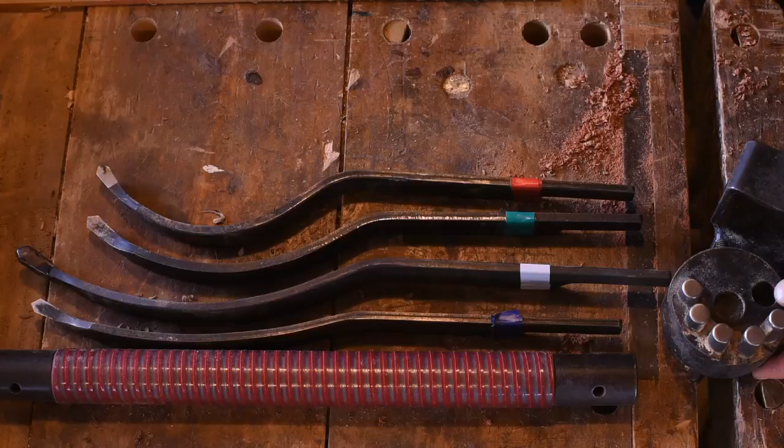This little video is to show you how to make your own angle finder jig that you use with the McNaughton curved blade system, their center saver, so that you can get perfectly even thickness bowls every time. The materials you need to make the center saver angle finder jig, let me show you.

The main thing you need is a piece of clear perspex, 6mm thick perspex ideally. This piece here is about 320 wide by 400, which is an ideal size, as it will mean that I can make the whole jig out of this one piece of perspex.

The only other materials you will need is some small set screws. These are 5mm M5 set screws, a set of washers, ideally a wing nut and a lock nut. Tools that you will need is a good old-fashioned ruler, a nice sharp pencil or clutch pencil. You'll need a compass for making circles, as well as a large compass or something similar to make large circles with.

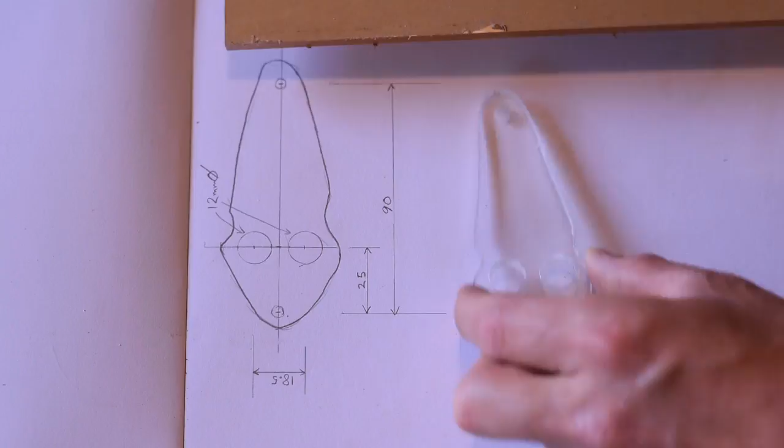You can see here now that I've taken the bolts out that we've got the 4 separate pieces. This is the first piece here that goes on the bottom. I'll show you how to make that piece first. Now, I've drawn out the shape for this first piece on a white piece of paper so that you can hopefully see it a little bit better in the lens. But I would suggest that if you're doing this for real, you would draw it straight out onto the paper covering the perspex. That way you can cut it out straight out of the perspex and it's done.

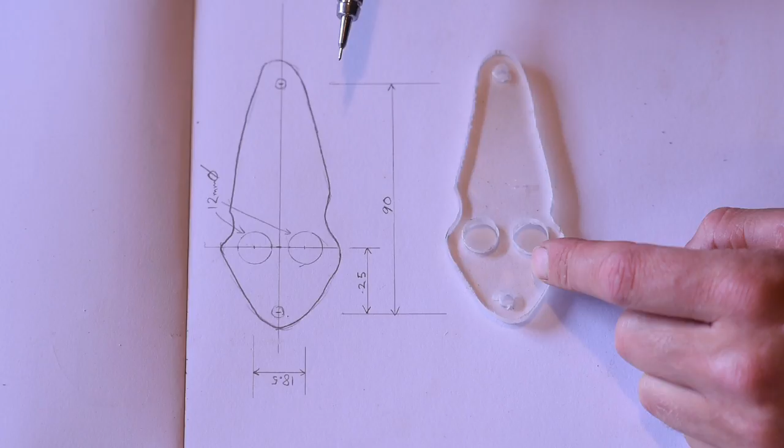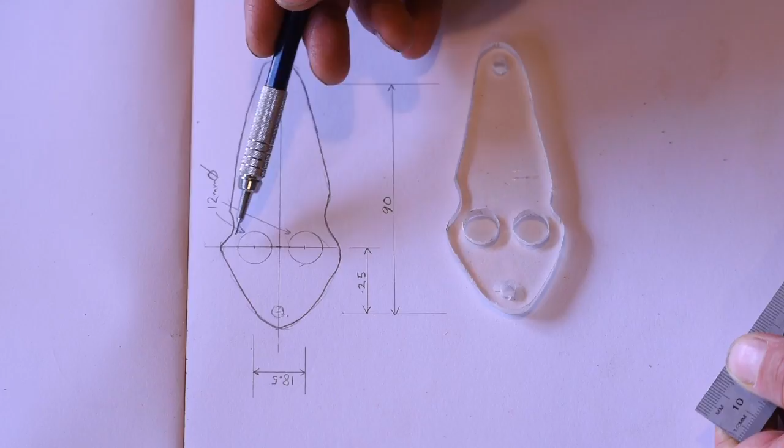Hopefully you can see the details here on my drawing. Basically it's just a simple case of drawing a straight line through the middle, another line at right angles. You've got 12mm holes here and here, which need to be 18.5mm centre to centre apart. You have the holes at the end of this little piece, which need to be 90 apart, and the distance from the front hole through to that centre line is 25mm.

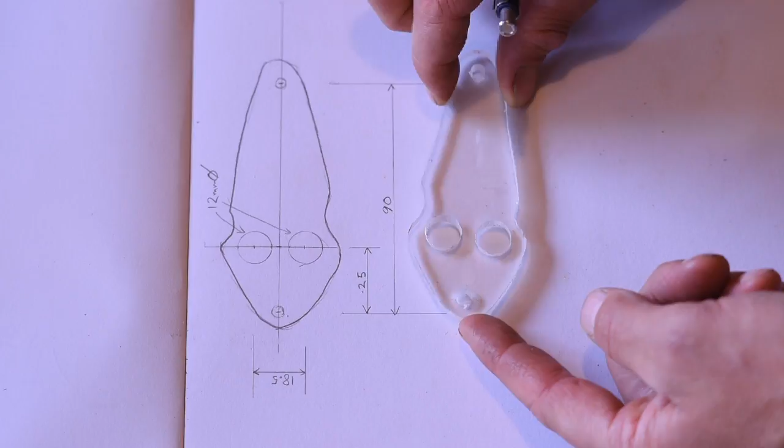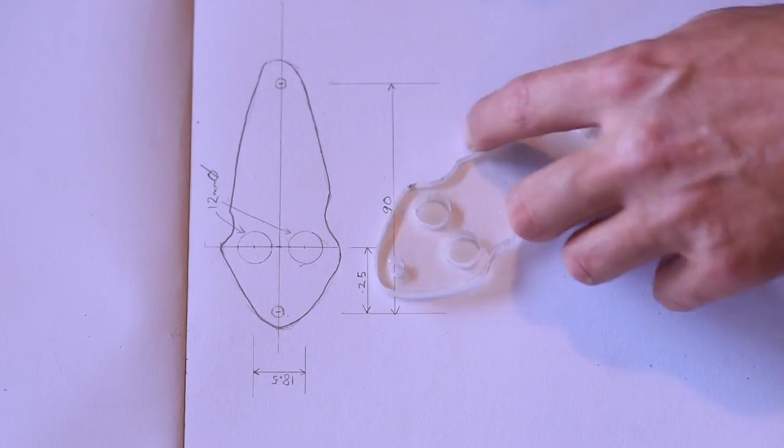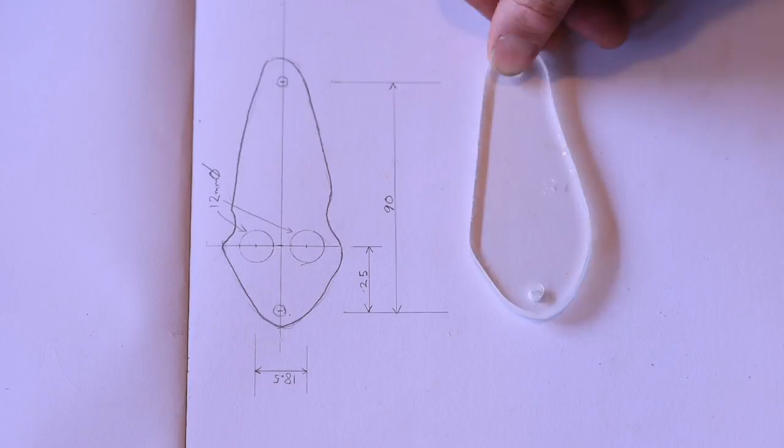The second piece is almost exactly the same as the first piece, just without the need for the centre holes or the dishes on the side. It's purely actually used as a spacer so that you get the thickness of the whole jig to be the correct thickness.

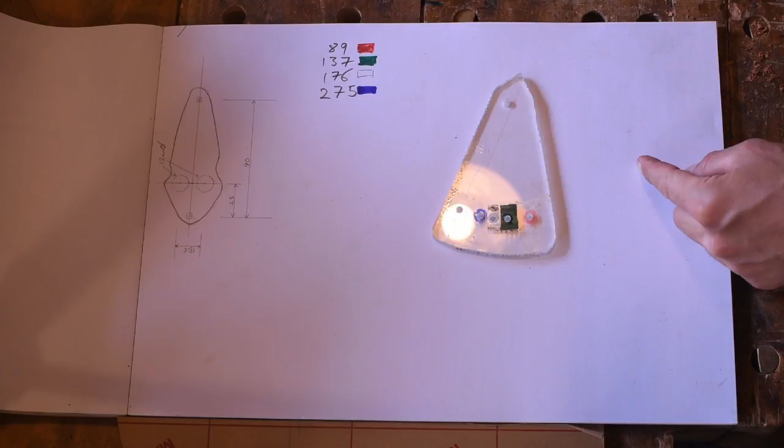Now this next third piece here is a little bit more challenging to make, so I will draw this one as I go. I will also be showing you how to make the larger version required if you want to make the angle finder jig version 6 rather than the version 7. The benefit or the difference is that this larger version 6 basically means that you don't need to use the computer system to work out the angles. You can do so by purely aligning this on the side of the bowl and eyeballing it directly.

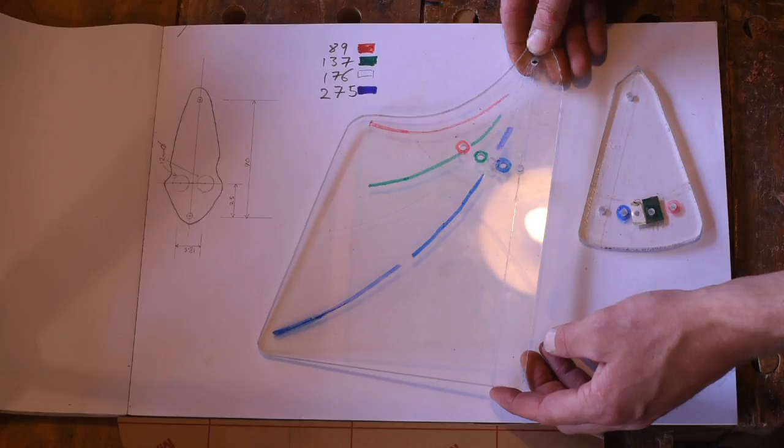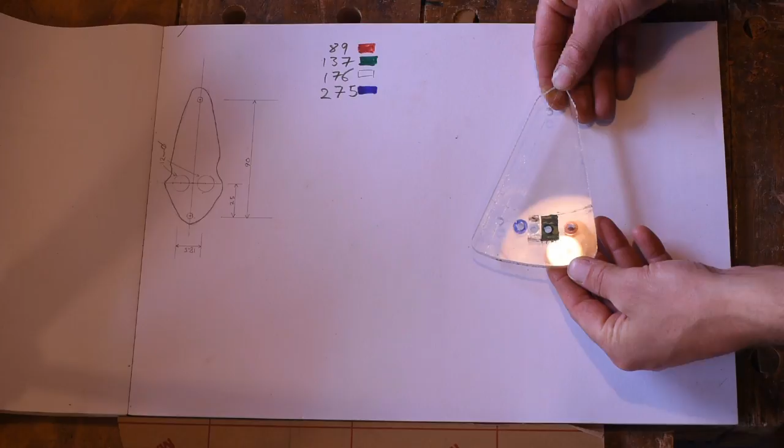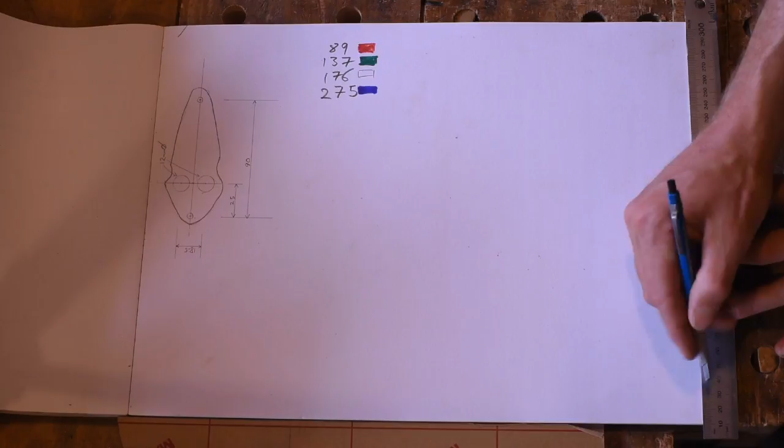I should mention that the version 7 is a lot faster to use and is the option I always use at this stage because it's just a lot more efficient if you do have access to a smartphone or computer to work out the angles for you, which I will explain a little bit later on. So the first thing you need to do is to draw a baseline across. Once again, you can be doing this directly on your sheet of Perspex. The second thing to do is to draw a vertical line which intersects the first line.

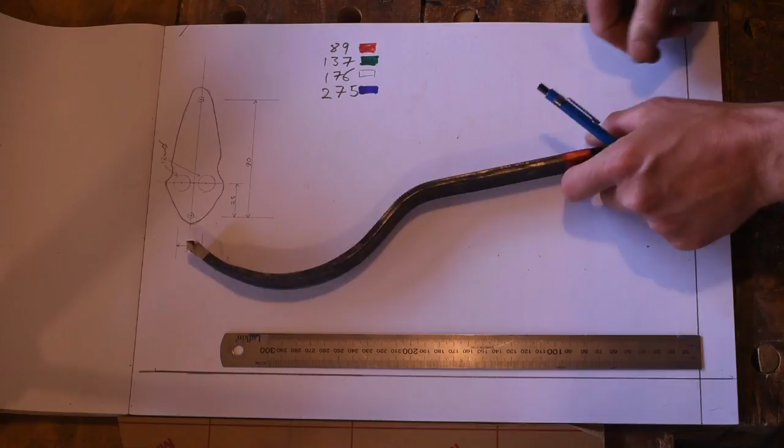Like so. Next, you need to mark up this line the radius of each of the blades, which I have written up for us here. So the first blade, which is the red most curved blade, has a radius of 89 millimeters. So you'll just need to find 89 and put a mark there, and then continue to do that up this line for all of these 4.

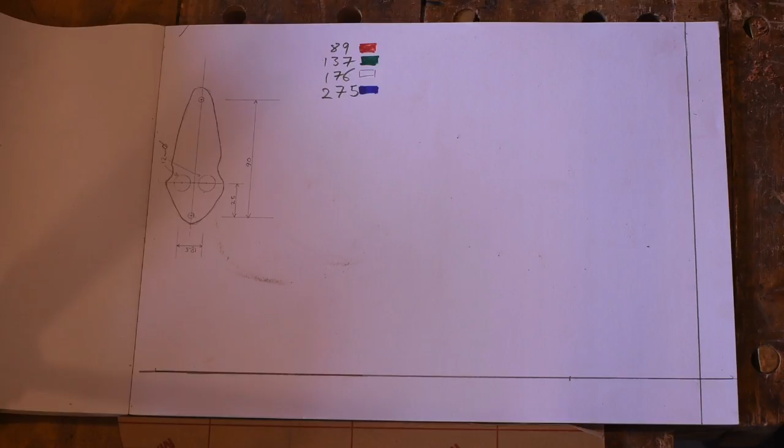So you can now see that I have marked the other 3 dimensions up that axis. The next thing you need to do is grab your compass and draw on each of the curves. Like so.

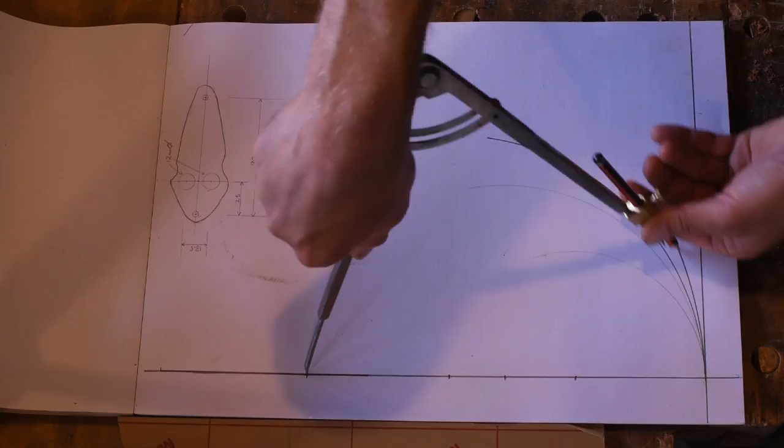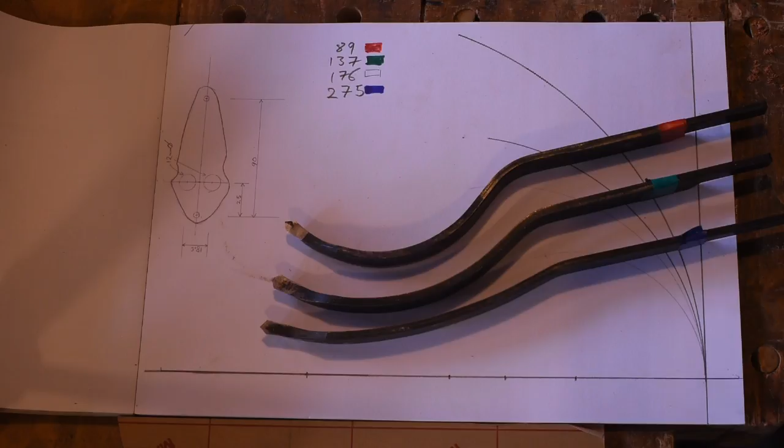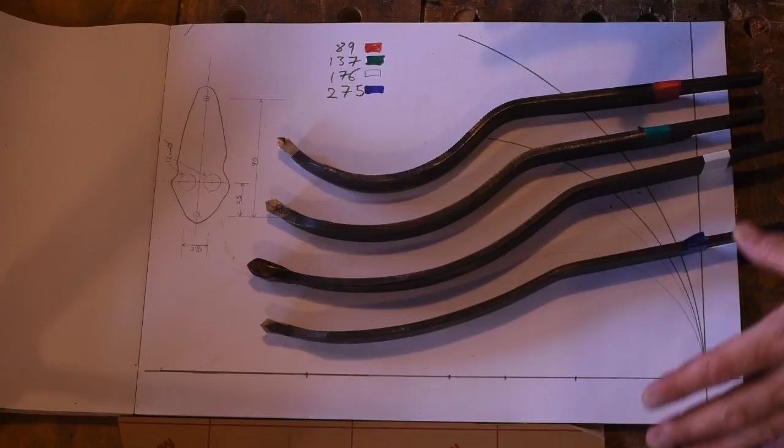You may be wondering why I'm doing 4 curves when typically there is 3 blades supplied with the medium-sized set. The 4th blade is actually from the large set that I also use. There's typically 2 blades supplied with the large set. One has the same curve as the softest curve here, but there is also another curve which sort of fits in between these 2. So I've included that so that this one jig works for both the medium and large sets perfectly well.

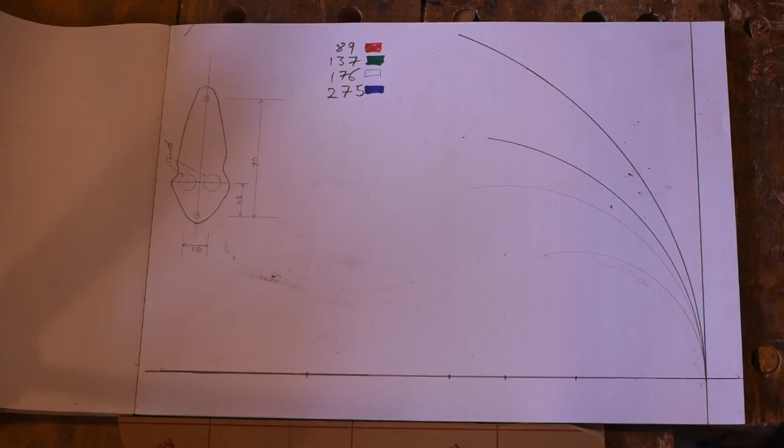So you'll also be able to see that, assuming I've got the dimensions right, the curve of this should match up with the curves that I have just drawn for the different blades. That being the widest one. Very good.

The next step is to measure where 50 mils goes from that intersecting point at the base, where 50 mils intersects with that first curve. Just there. The next step is to see where the tangent from that point of the curve there meets up with the baseline again.

I'm marking this with a heavy pencil just so you can see it in camera, but I would suggest using a nice fine pencil so your markings are as accurate as possible. Just to double check, that new point that you just created on the baseline should be about 25 millimeters in from the vertical axis there. And we're going to call that point Y.

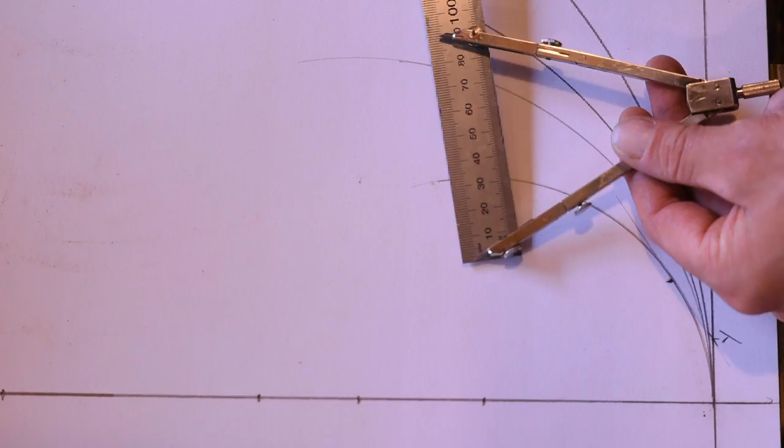The next thing you want to do is set your compass at 90 millimeters, which I have already done. And then from point Y, you'll want to just mark lightly across all of the 4 big curves.

Alright, now the next thing we need to do is, once again working from point Y with the rule, you need to find where the tangent for each of these curves is, so where it just touches each of the curves, and then go and mark out here on this new line where that point is. So we're going from Y, the tangent to each of the curves, so this is the tangent of the largest curve, and then you mark where that is on that outside curve there. So that's the first one.

Then once again from point Y, there's the tangent for the next curve, so I mark that out here. So these are actually the positions that we will be drilling the holes. The next one, which is not so different from the previous, is there, and the last one is right there.

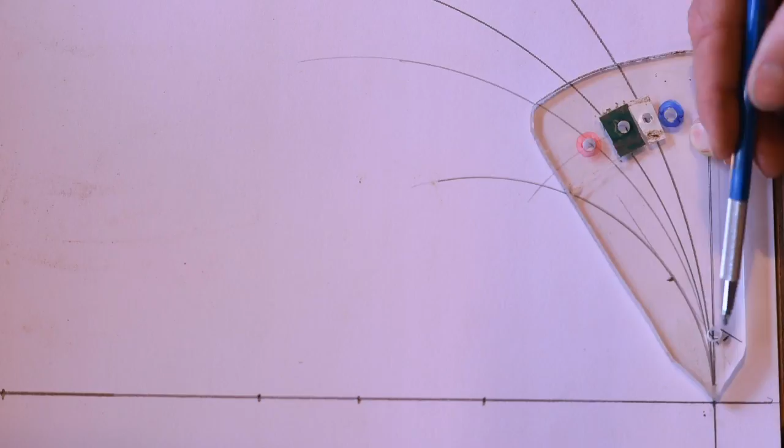So if I grab this back again, what you'll find is if I lay this on here, we've basically got the tip at the intersection, Y is a centre hole, and then you've also got holes marked for each of the different coloured pieces, including another one here on the baseline.

So if you are making the version 7, all you need to do once you have marked this out on an actual piece of Perspex is go along and drill out these holes that you've just marked. You want to then use either tape or coloured markers to mark each of the holes, so you know which blade it relates to. Once again, the outside shape of the actual piece of Perspex isn't so critical, but if you do something similar to what I've got here, you won't go far wrong.

You do also need to, I don't know if you can see it in the camera or not, engrave that baseline into the piece of Perspex as well, as we will be using that to align with the other piece that we'll get to shortly.

Alternatively, if you're making the version 6, you're going to need to have a larger piece of Perspex. You'll want to go and mark off where you realistically expect the depth that you could get with each of the blades, and go and mark them on your drawing, and then have a piece of Perspex which actually incorporates that whole area. And you then want to engrave this piece with the lines, and once again colour code them so you can know what blade it is relating to.

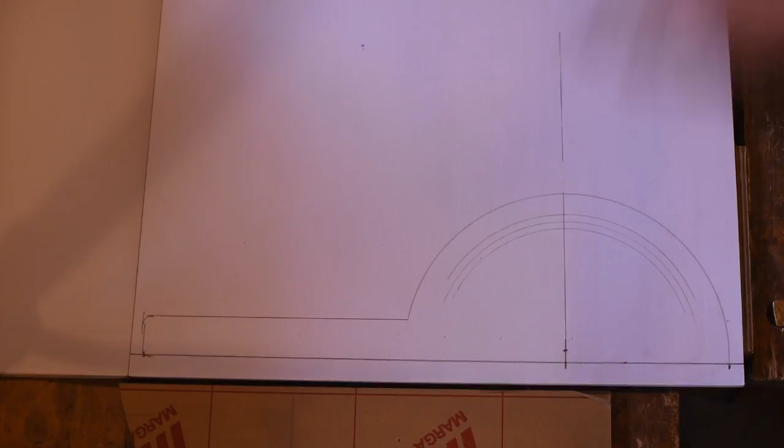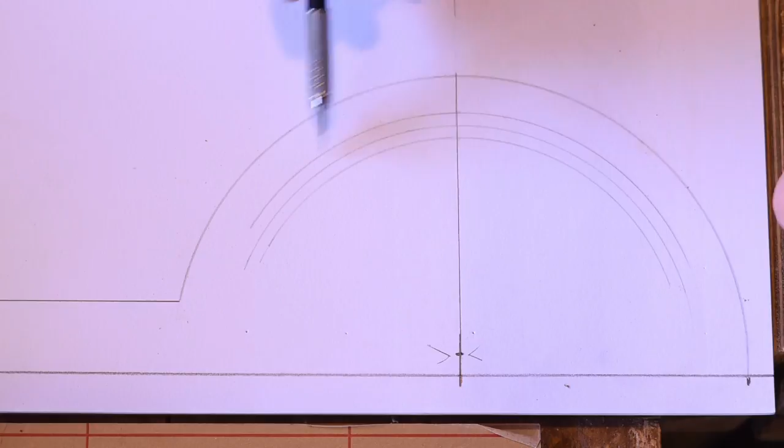I've just zoomed in so you can have a closer look at what we're going to do next. Hopefully it's not going to be too hard to find a protractor, since that's something else you will also need to use. I should mention that it is important that you always use that point there, which is 8mm in from the edge line, for all of your curves through here and the next steps that we're going to use.

So what you want to do is position this there on that 8mm in point, and we just want to measure off positive and negative 60 degrees from that center line here. So if we call that center line 0, we're looking at 1, 2, 3, 4, 5, 6. So that's positive 60, and then 1, 2, 3, 4, 5, 6, 60 degrees negative.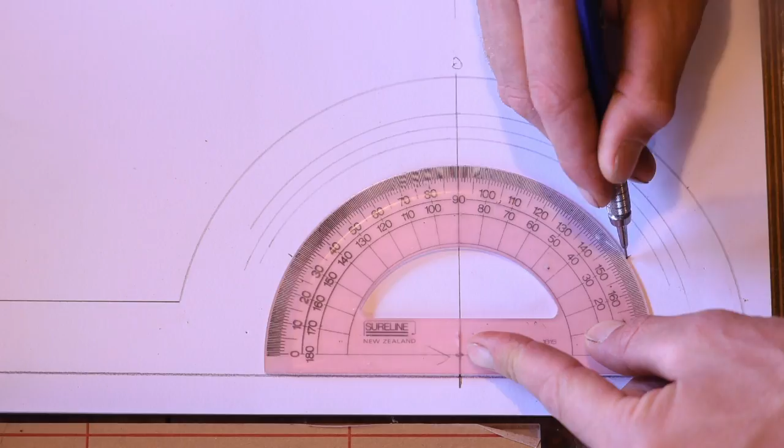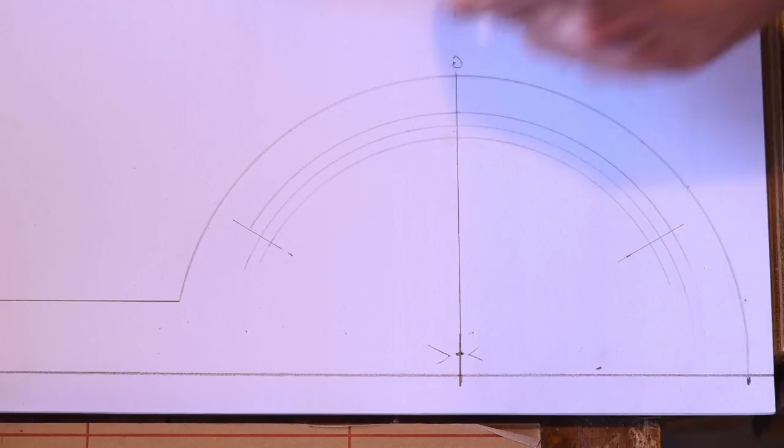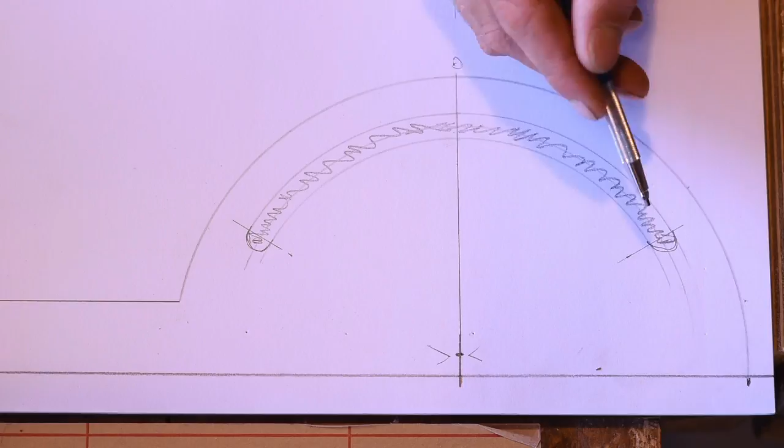And then if you just use a rule to extend that line out across there, and across there, if you then allow some area for the nut and bolt to get to here, that area through here is what you will later on cut out entirely, like this here.

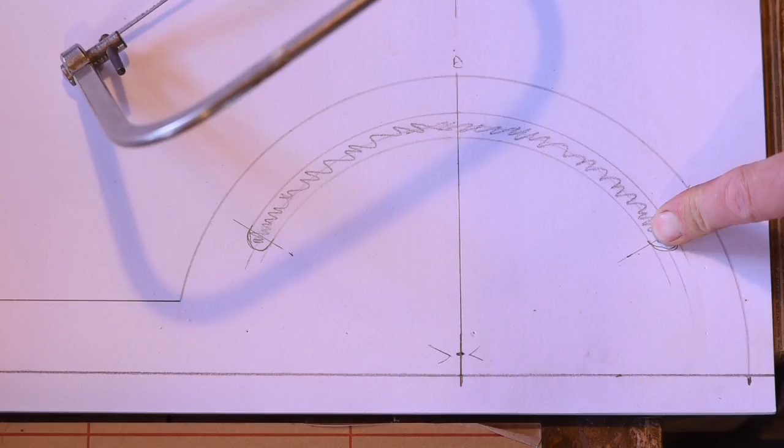The next thing I would get you to do is actually go and cut out this shape, including the centre channel. You can do that on your bandsaw and a coping saw to get the inside channel cut out. I should mention that it is good to leave the paper on both sides of the Perspex at that stage still, because after you have cut it out, you then want to flip it over and do the next set of marking on the other side of the jig rather than this side. That way the intervals that you're about to engrave are hard against the piece underneath it, and that way you get a better accuracy for your degrees that you set.

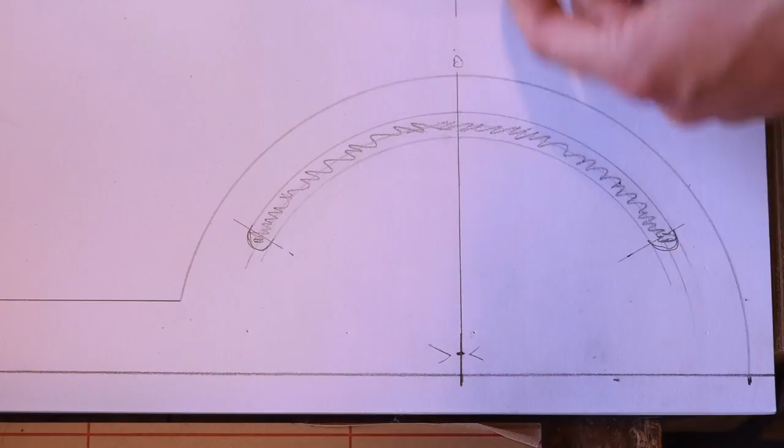I'm not going to take the time to draw the inverse of this here, but just remember that this next lot of marking we actually want to be doing on this side of this piece. You want to put the compass down again in the same position you had it before, with the centre point there. This time you want to go and mark off every 5 degree interval right through positive 60 and negative 60.

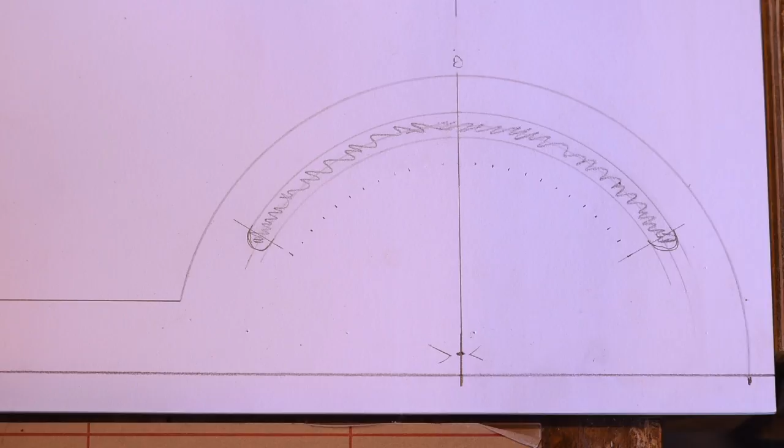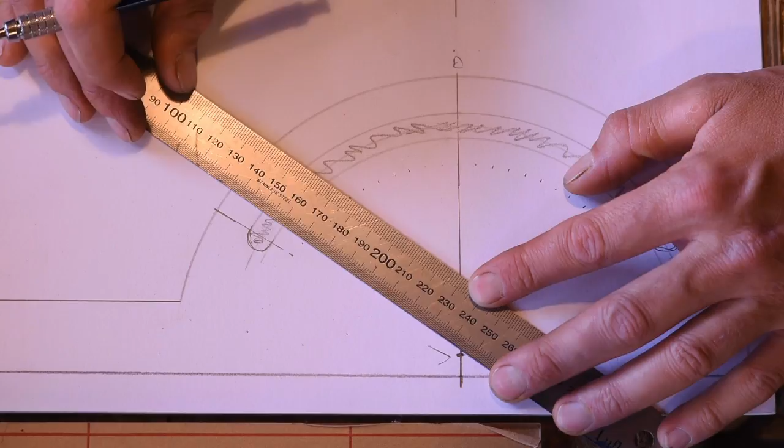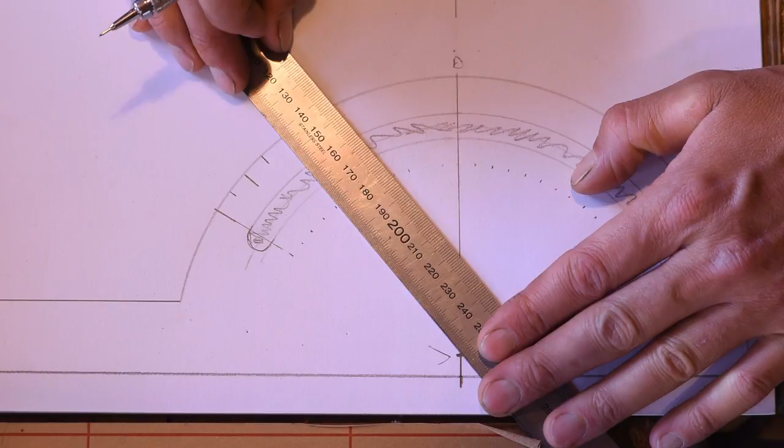Once you've done that, you then need to go and extend the points, including the 60, right through to the very edge of your perspex. Like so. Every 10 I make a bigger line, every 5 I make a smaller line. And you'll do that all the way around here.

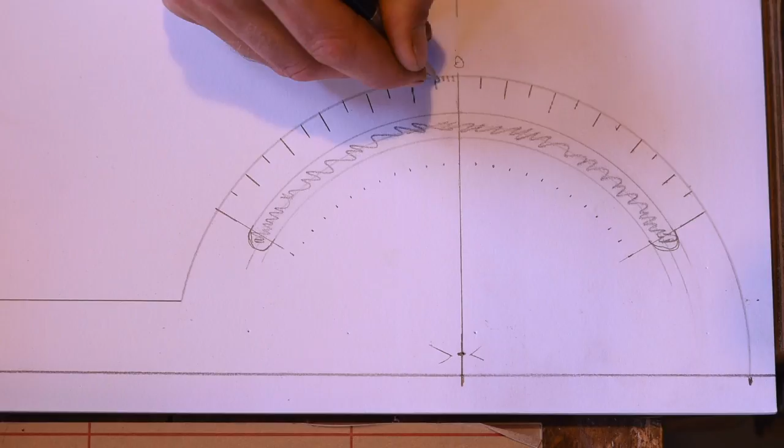Once you've finished marking them all off, both positive and negative, you then want to go back and mark through 4 short lines in between every mark, big mark, and then another 4 there. I'll just grab a pencil and show you it. And that, in effect, even though you're only doing it by eye, gives you a pretty good 1 degree interval all the way along. Extend that both positive and negative.

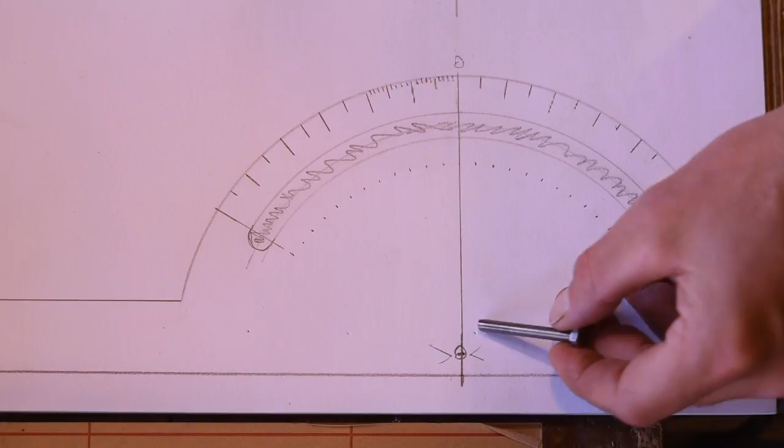Now the last thing you want to do before you take the paper off both sides is to go and drill out the hole there to accommodate your set screw. After that you can peel the paper off both sides of the perspex, so you have a piece which should look close to this. You then want to flip it back over so you're back working on the first side, and go through and mark out the degrees every 10 degrees.

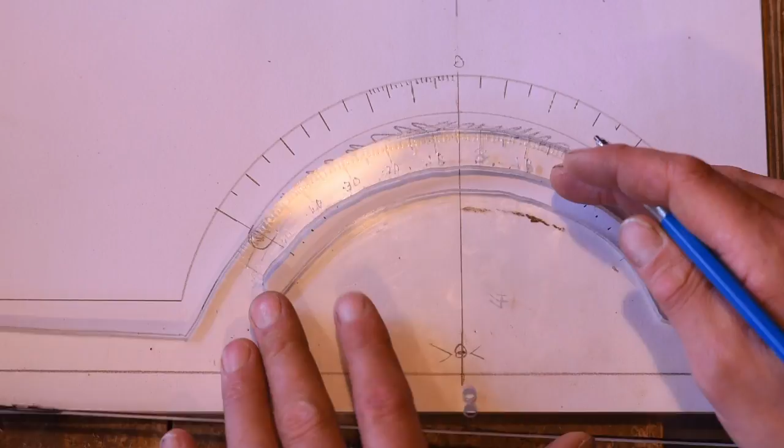Now something I was saying incorrectly before is that you want the negative degrees going upwards on this angle and the positive going down. So using the hot poker again on this side so that the numbers are up the correct way when you read them, you want to go and mark -10, -20, and so forth, right up to -60, and this end will be +60.

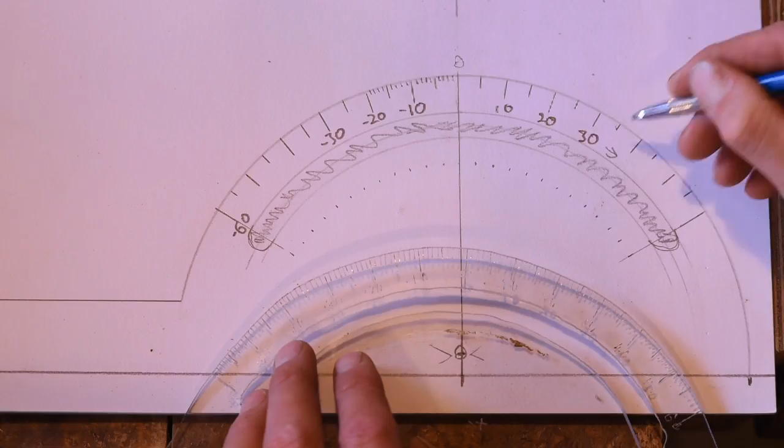Now, if you've got this far, I have to say I'm impressed. The next step to do is to go and assemble each of the pieces into one complete jig. To do this, start with the first piece that we made, inserting the set screws up through it. Take the next piece that we made and slot that down on top. Like so. The next piece, once again, slots on top.

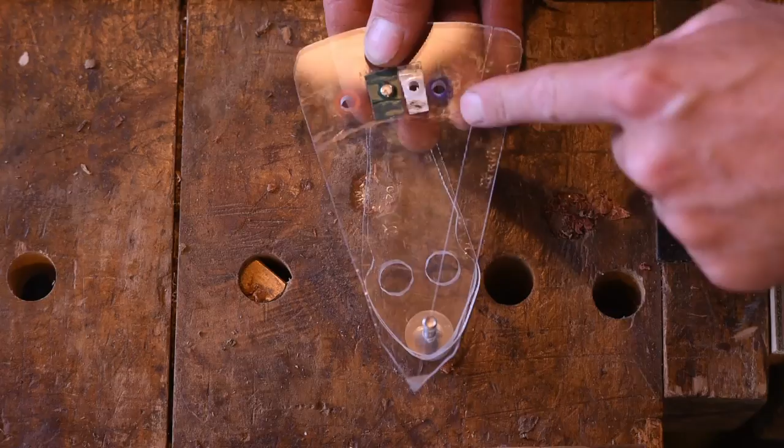This is the one that you adjust the different holes depending on what blade you're using. I'll set it on the green one at the moment, since that's the one I tend to use the most at this stage. And then the top piece slots down like so. You then want to grab a couple washers for the tops. Grab the wing nut and do him up there, and then the little tight nut you need to then just go and lightly screw down at the bottom. And there we have it, one assembled jig.

Now, to use this, if you want to set it at, let's say, negative 22 degrees, that thin line that you engraved, I should say, into the third piece, which is a little bit hard to see on the camera, so I've marked it with a bit of black marker here at the very end. That's the one which you keep in line to go up the scale of degrees to, in this case, negative 22. Hold it in place and just tighten up the wing nut a little bit, and that'll just stop it from slopping around.